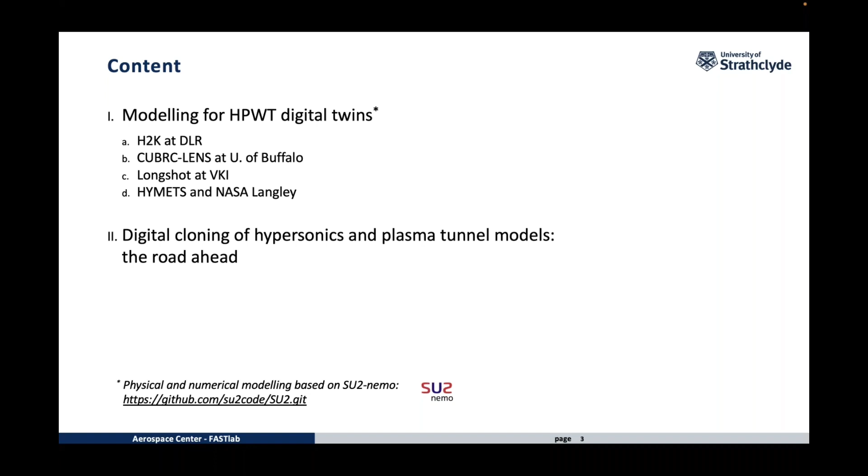So let's start with one of the initial engagements with the hypersonic wind tunnel that we have had with NEMO. In this case, the modeling approach was essentially nothing, in the sense that it was just there to validate a little bit the ability of NEMO with mesh adaptation to capture a certain hypersonic flow in the case of two spheres that are close together, and therefore there is an interference of shock waves.

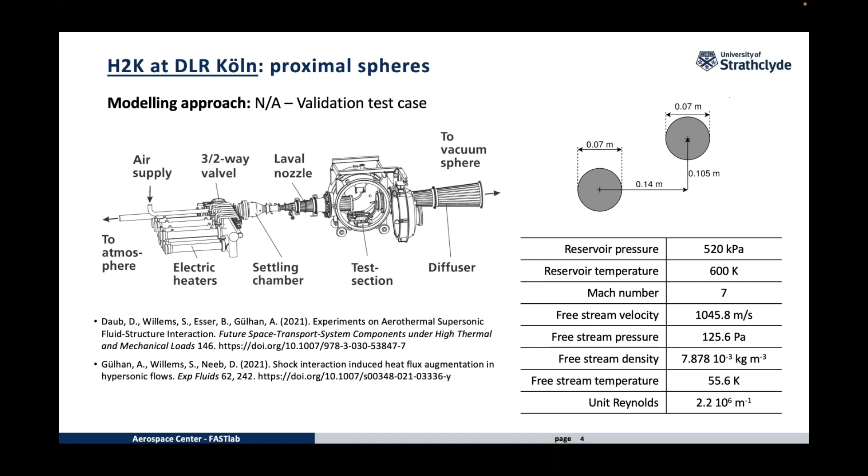Here you can see the hypersonic wind tunnel where this experiment was done. So it has a relatively standard definition for a wind tunnel. It is a wind tunnel at DLR in Cologne. And in this case, we have been able to do two things.

So on one side, to look a little bit at the pressure that is on the sphere that is behind, so the one that is following, where we have a shock wave that is impinging and interacting with the other shock wave, and this is a surface-related quantity, what you see here on the right. And we have a little bit of validation of the actual flow field in terms of a comparison between the real Schlieren and the numerical Schlieren that we have obtained by post-processing the solution.

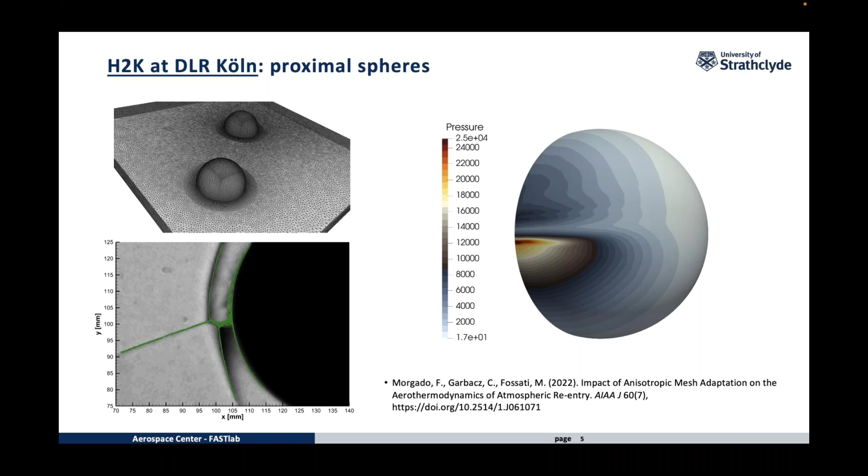So again, no actual modeling of the wind tunnel, no actual digital twin, but still something that leads us one step towards the right direction. The second case that I would like to show here is again hypersonic flow, but in this case we are now looking at the LENS hypersonic wind tunnel in the US, and this is a canonical case, very well used in the community, where we have a double cone. The idea is to try to simulate some local flow features that you might have in hypersonic vehicles.

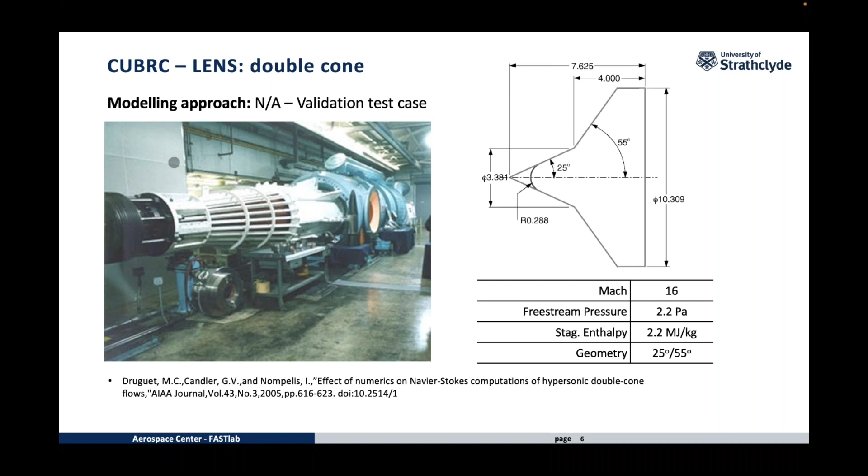And also in this case, we did not have any specific intention to do a modeling of the wind tunnel. So we are showing a little bit the validation that we have been able to do with this case, because we wanted to make sure that we could not only capture nicely the mechanical loads, so pressure in the case before, but also have some reassurance about our ability to replicate the heat fluxes, which is a very important quantity that has to be kept under control, or in any case managed, when we have hypersonic flow.

So here we are dealing with a nitrogen-oxygen mixture, and what you can see here on the left is the comparison of the heat fluxes along one line here. It was solved in 2D, and it was axisymmetric in this case. And so the comparison of the heat fluxes is reasonable, it's fair. And we were happy to see this.

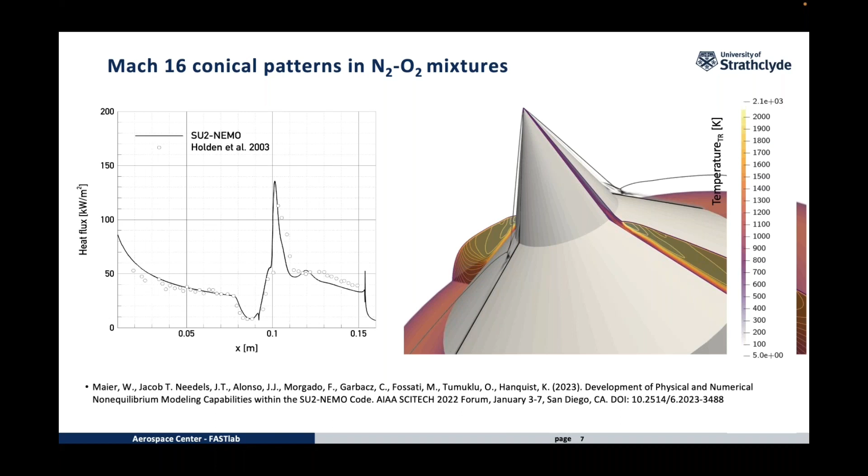Now, we then said, okay, now that we are sort of happy with the validation, we started doing a little bit more analysis about what we can do to replicate some specific experiments in specific wind tunnels. And this is the case of the Longshot hypersonic wind tunnel at VKI. In this case, what we are looking at is a simulation of an experiment where we have, as you can see here, a cylinder and a ring.

Now, the cylinder is fixed, the ring is suspended with some wires, and at the beginning of the experiment, the wires are taken away, and there is a free-flying ring, and the dynamics of the ring is affected by the interference between the shock wave generated by the cylinder and the shock wave generated by the ring itself.

And here, what we have as a modeling approach at the top is that our friends at VKI provided us with the conditions that they were experiencing at the exit of the nozzle. So essentially here, this is just a 1D model. So don't look at this as a different thing, but at the very exit of the nozzle, at a certain location, they were providing us how quantities such as pressure, density, and velocity were changing for the duration of the experiment. So we are talking about 20 milliseconds of one experiment.

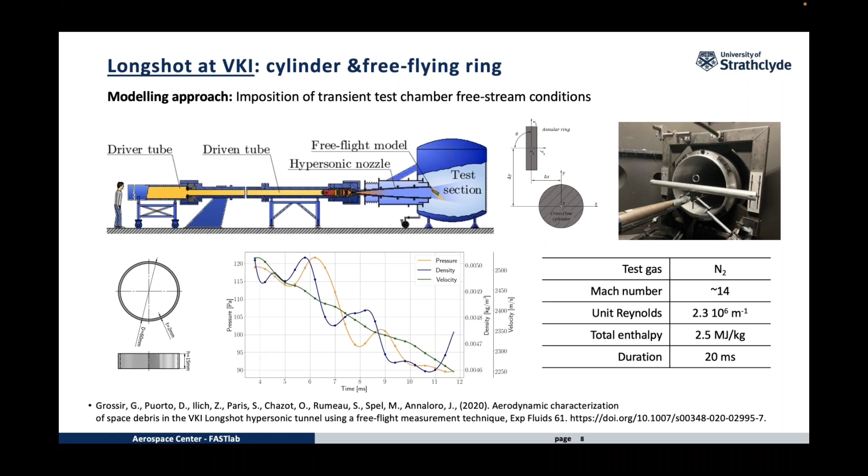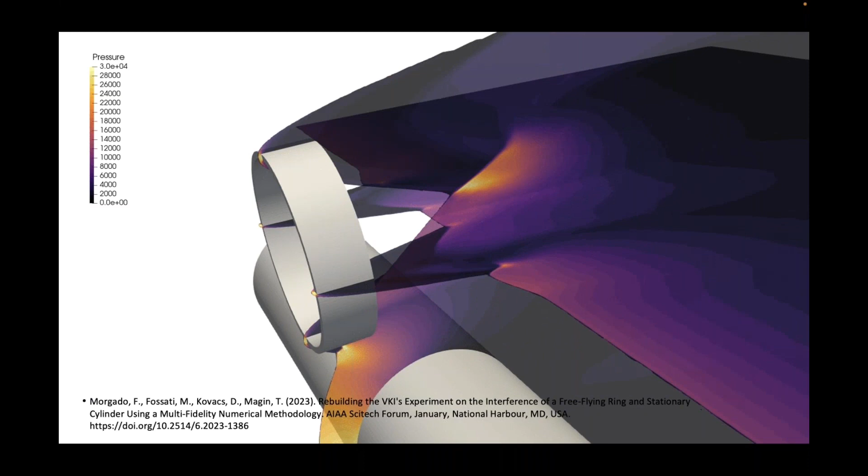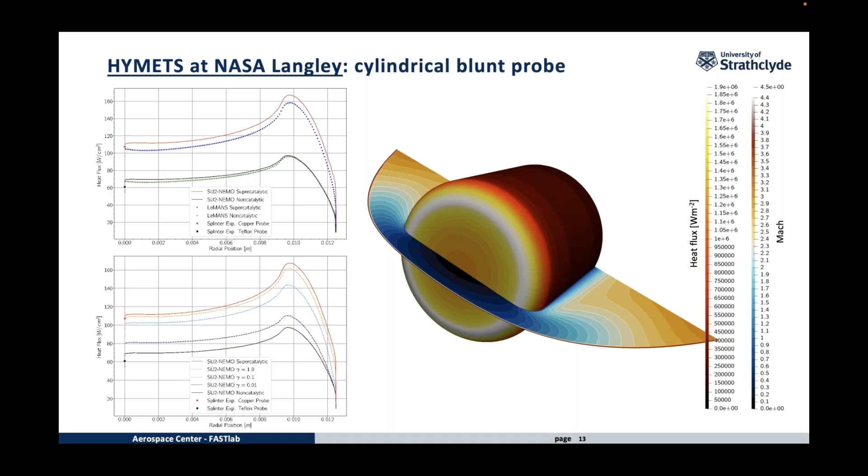So, all in all, and I want to conclude here, what we have is again a road ahead of us where we will be trying as much as we can to develop all the modeling in terms of numerics and in terms of physics capability of NEMO to try to tackle what we consider at the very top these important features in the code.

So something that will allow us to study turbulent transition, and there is currently efforts going on in this direction about keep working on LES and other advanced methods, and definitely embedding all the NEMO capability within a multi-fidelity approach.

We cannot think about developing a digital twin of a plasma wind tunnel where every single side of it is high fidelity. So we need to do a little bit of thinking about where we want to go high fidelity, well, most likely in the nozzle and in the test chamber, but that's where we may find other ways of modeling things, the part of modeling sensors and probes.

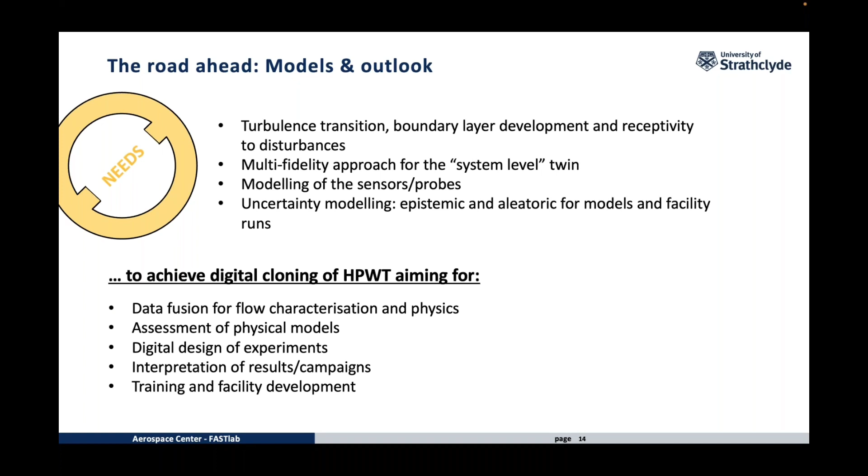And definitely introducing this uncertainty modeling and quantification to make sure that whatever are the aleatoric or epistemic uncertainties that somehow are unavoidable are in any case taken into account. So with this, I want to close, and I want to thank, of course, all the other collaborators that allowed us to get these results, and hopefully will allow us to keep continuing in the development of it.

Thank you very much.

Yes, please. Yes, I was wondering, in the spinning experiment, how relevant are the unsteady effects actually? How fast is the ring gliding from this perspective? How fast?

This is a question I'm not able to answer right now. I have another presentation that shows the time and the position. I wouldn't be able to say how fast in meters per second, I don't have it on the top of my mind. But this is exposed to a Mach 14 flow, so it can be quite significant.

Is that a 6-DOF kind of thing? Yeah, this is essentially what you see here is SU2 NEMO that is embedded in a software that, if you remember, Fabio showed last year. It's called Titan. It has a 6-DOF and then calls SU2 NEMO and solves for forces, moments, and then it iterates and looks at the thing.

There was another question: is the NEMO solver working with the implicit scheme yet, or is that some other way? It is a way of saying yes and no, because SU2 NEMO right now lives with 2 thermochemical libraries. One is mutation++, the other one is what we call a native thermochemistry library. One is coming from VKI, the other has been developed as part of NEMO.

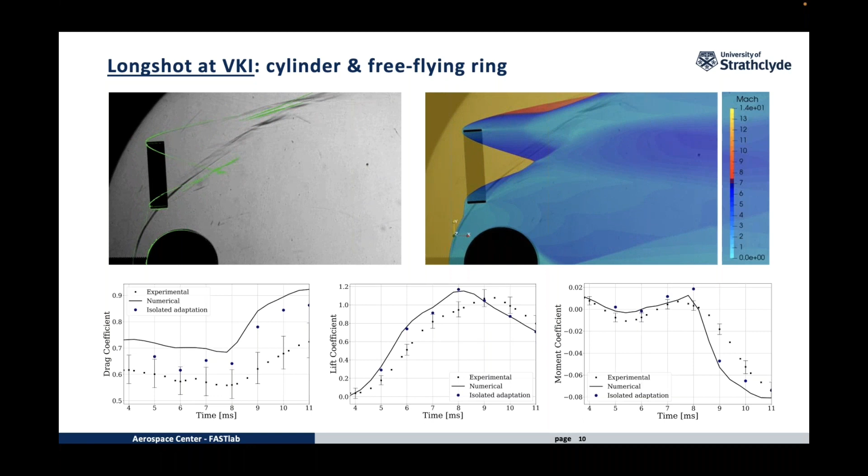And there is an implicit solver that uses the native thermochemistry library. It's a little bit limited in terms of scope because you can go at most to consider air-5 as a model, so in terms of O2, N2 and so on, atomic oxygen and atomic nitrogen, and that goes implicit. But if you want to go and use mutation, that has to go explicit. So we are working on trying to make an implicit solver working with mutation++. We're not there yet, but if you're okay with running air-5, you can run it implicit.